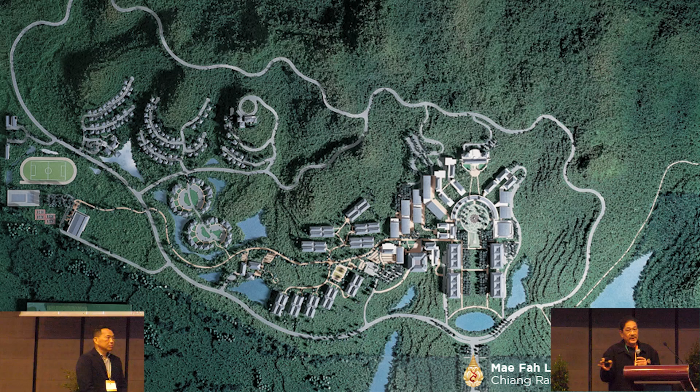But first of all, I'd like to bring you back to the Mae Fah Luang project, which started in 1998, almost 30 years ago, as Professor Wang, who is chairman of the university, mentioned. Can you imagine, back almost 30 years ago, we were with this land with no high-tech instruments at all, no GPS. I'm the project manager of this project.

The land plot is around 2,000 acres altogether, but what we were assigned to develop was just the 500 acres in front of the plot. At that time, with no GPS, I had to use aerial photography and walk, and went with a small truck trying to locate the boundary of the university. It was quite difficult.

In fact, we have two projects, about the same, both academic projects. This one was designed and built 20 years earlier than the second one that Mr. Somkiat will present. The most important thing is that this project belongs to OHEC, the Office of Higher Education Commission.

It was a competition project. The idea, as Professor Dr. Wang said, is that the main concept is to try to minimize cutting down trees, try to minimize changing the topography and everything. So we kept that concept strictly.

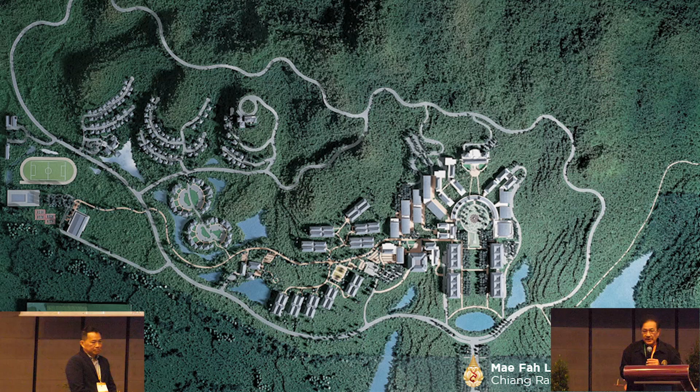Anyway, we finished 82 buildings, and this is a picture, probably not long ago. You'll be able to see the big trees, like Professor Wang said. When I came here, it was a paddy field down at the foot of the mountain - a destroyed land, not many big trees. But once we worked according to the concept design, we created something like this.

Two projects belong to OHEC, and another one is PTT, the Petroleum Authority of Thailand. As an architect, we try to convince the client to do a good master plan, to do good landscape and blend it together with the architecture. Fortunately, both of our clients truly understood the concept of the planning.

Since we are in Chiang Rai, I'll present this project to you a little bit. Like Ajahn said this morning, King Rama IX said to plant the tree in the people's heart first, and they will plant the tree.

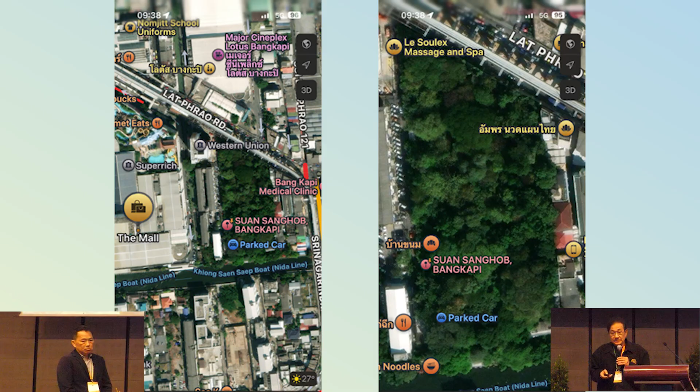This is my house, right in downtown Bangkok. It's 4 acres. Sometimes you can hardly convince your client to plant trees, to do a good landscape, but this is my house - I'm the client, so I can do whatever I like.

And our family, since my father, we started working, planting trees like this. No one can cut the tree. This is the only privately owned place in downtown that we try to maintain - anyone who cuts a tree will be beheaded instead of the tree.

But anyway, just to give you the point, as our Professor Prabhakorn said - this is my house, as you mentioned. So before that, start doing what you can do first, like planting trees everywhere.

Now I will pass to the second part, the main presentation of this topic, to Mr. Somkiat. He's the project manager of the Wangchan project, which belongs to PTT. It's pretty creepy - just kidding.

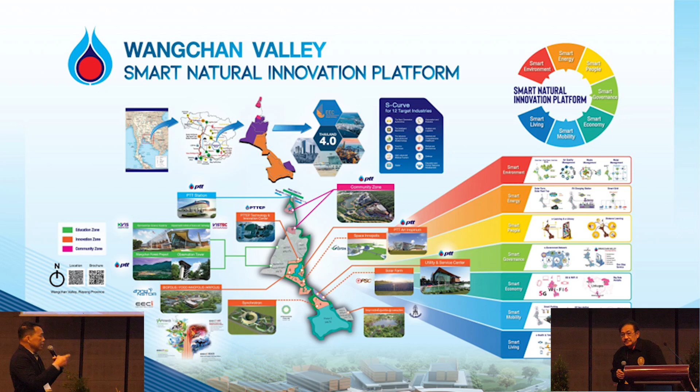Just a bit of background on the Wangchan Valley. Basically, it's really like a science research park, belonging to PTT, similar to Petronas of Malaysia, the Petroleum Authority. It's coming up pretty good, with numbers of institutes or research arms of corporates coming to the place.

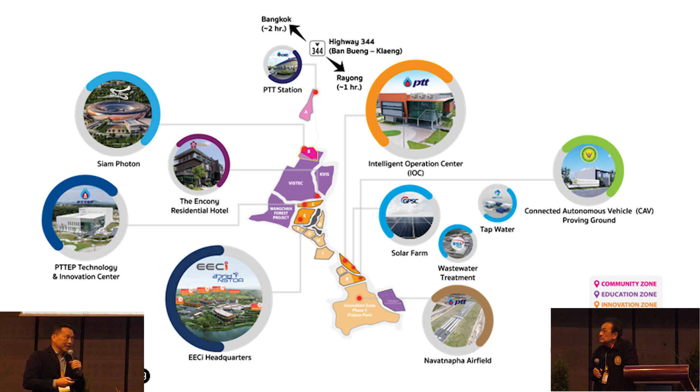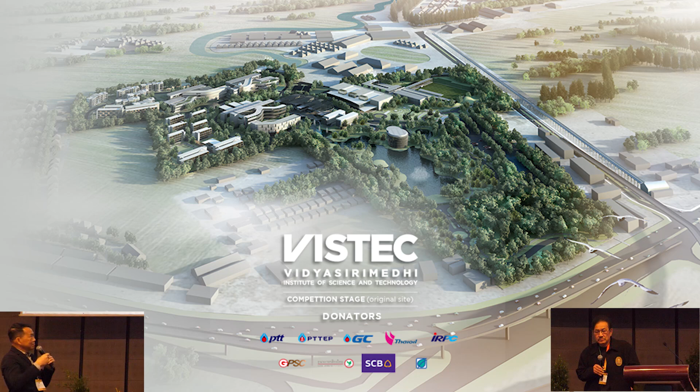They thought perhaps they got a better location, so they moved to this Wangchan site, and we got short of 2,000 acres of land. It's a coincidence - this is the same site area, 2,000 acres, as the Mae Fah Luang project. I believe originally in the 1990s, the land was accumulated for an industrial estate.

We still see banners protesting the industrial estate for this land when we went there. PTT asked us to choose a portion of land to build a university, a future university, and this is what happened and what we did.

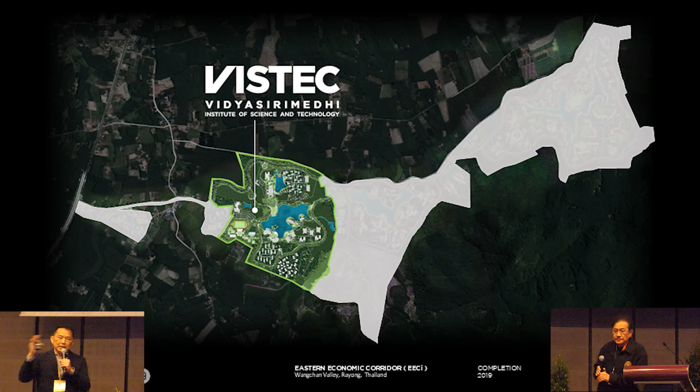But we proposed at that time, what about the rest of the land? Are you going to just leave it empty? Should we do something like an estate, some infrastructure so that institutions or research companies can come in? They actually agreed to do that, and this is just a study master plan.

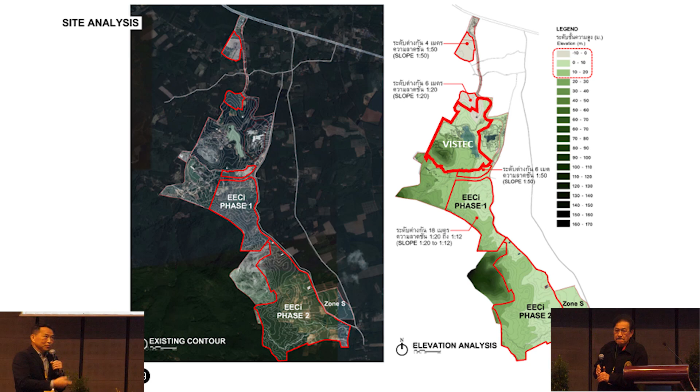Of course it will be phased, and then it became part of the EECI, the Eastern Economic Corridor, initiated by the government, and we are quite honored to be part of that future project. It will be subdivided into smaller pieces of land, and you can see it's coming up.

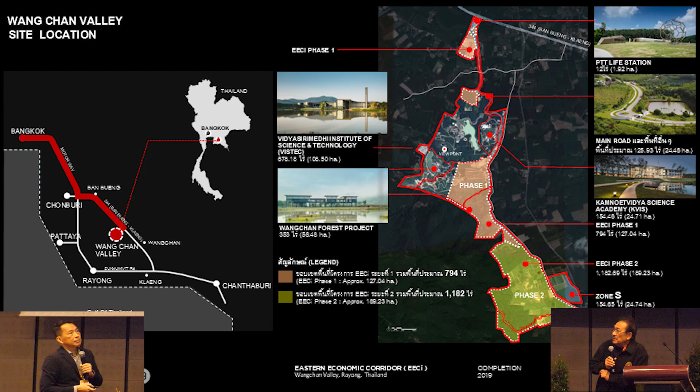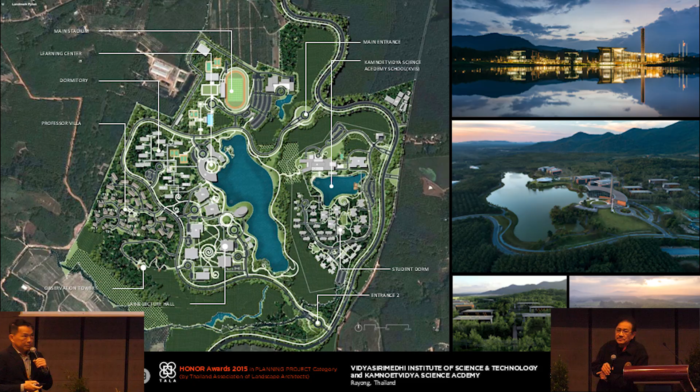Now I'd like to bring attention to the university part. Actually it's not yet a university, but it's basically a science institution that provides only postgraduate education. I think it comes from the belief of PTT that science will lead the country, to have a science education.

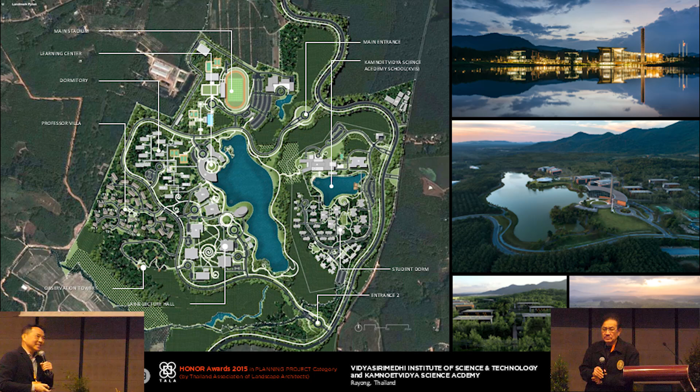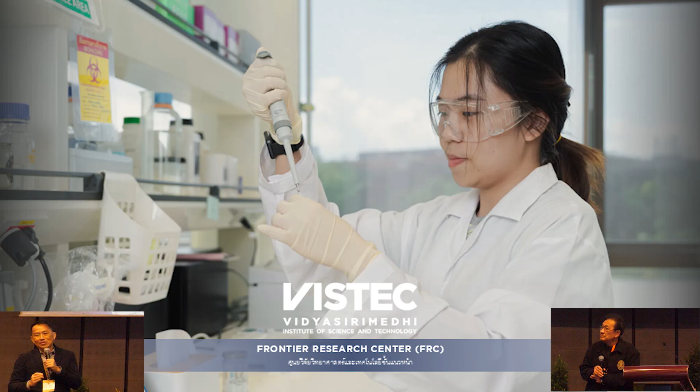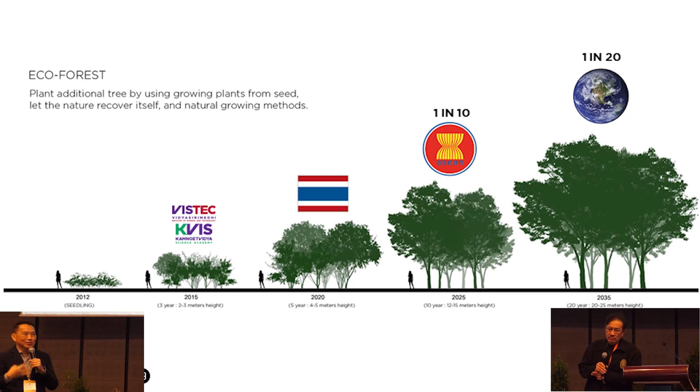You can see that big lake that Prabhakorn just mentioned. Just a bit on this VISTEC - it's still called VISTEC, and they provide only frontier research, with the ambition to go global. This was from the competition page. We also proposed to plant some trees that could grow along with the ambition.

And those are some pages from their website. They are actually doing pretty good at the moment.

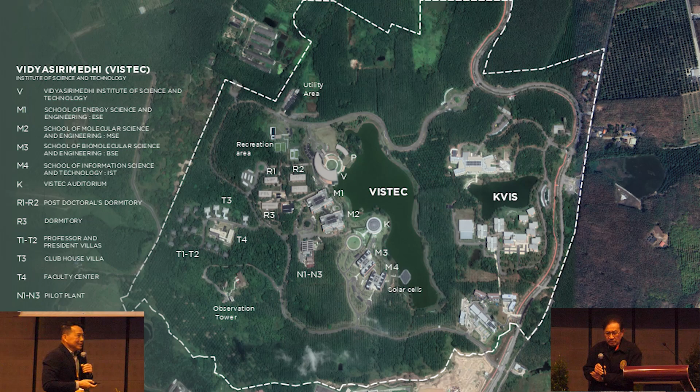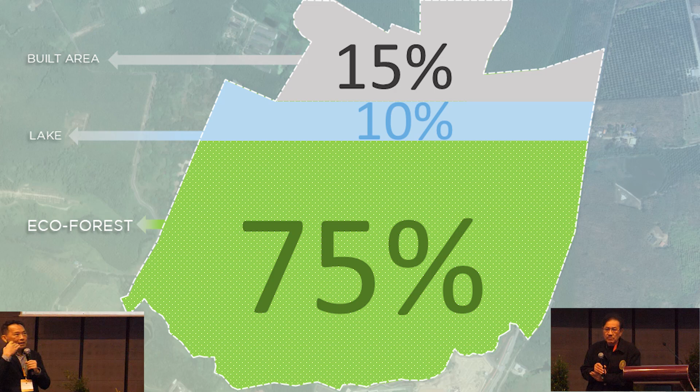Now back to the lake you mentioned. We had this idea of having an eco-forest, lake, and minimal built area. We also learned at that point that the lower part of the site is actually about 73 meters above sea level, and there's some low-lying area that gets flooded every year.

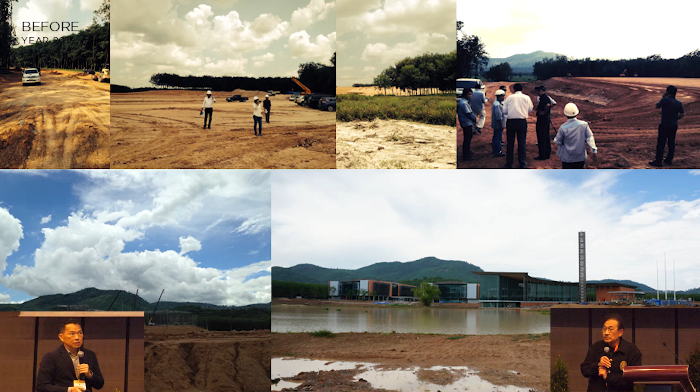Even though they are on private property, that's the construction image during the construction, built with a lake in the mountain. People always complain about why we do the lake on the hill, since it's quite difficult to contain water, but in fact that's problem solving - we try to manage the water drainage in order to protect the community from flooding. That's the answer we give to the public.

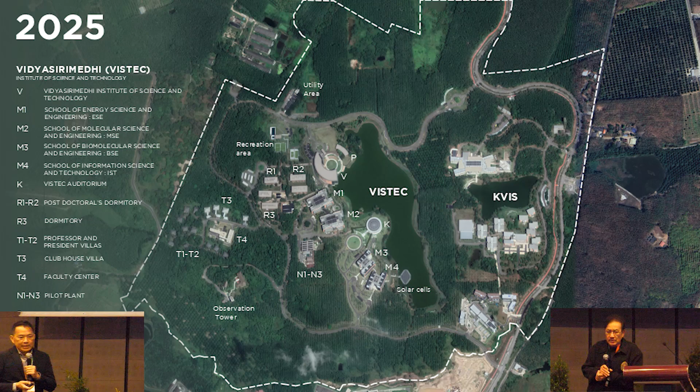The mountain behind the campus is similar to Mae Fah Luang. The problem with Thailand is that we got rid of the forest and made it into agricultural land - that's what happened, and now we have to return it back. They did all kinds of agriculture, like cassava, pineapple, rubber. At some point, just right before the construction - that's the construction of the project - and nowadays it's turned into, yes, it looks pretty good.

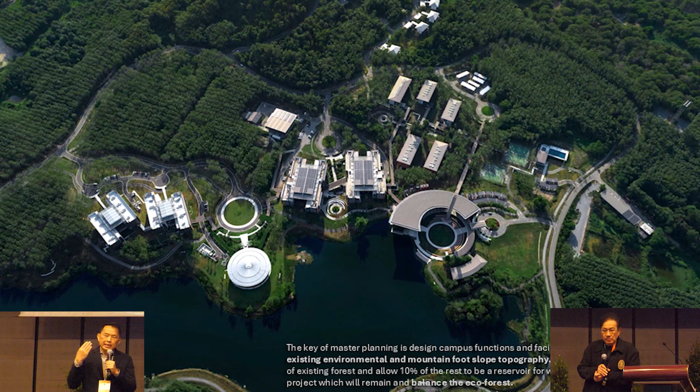And that's the photo, just a bit on the rubber plantation. When we work on the project, there's also a voice saying the rubber tree has no value and will die in some years. But in reality, when I did some reading, they can last 40 to 50 years, and in some cases almost 100 years. So all plants are creatures.

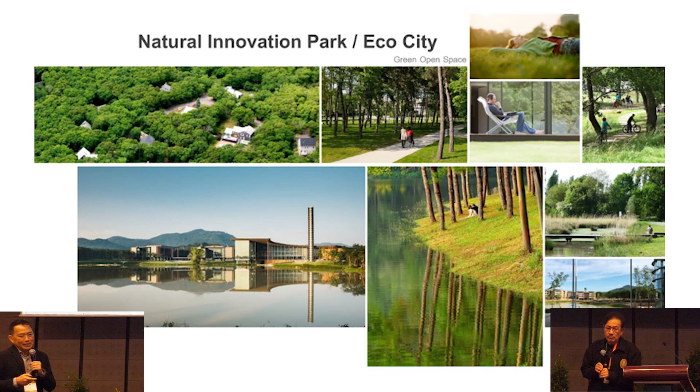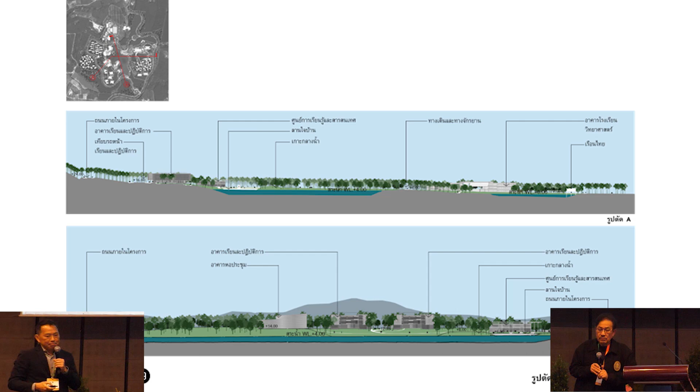That's from some presentation page, but basically to have a campus that goes along well with that, this section shows the man-made lake, and actually there's a smaller lake as well.

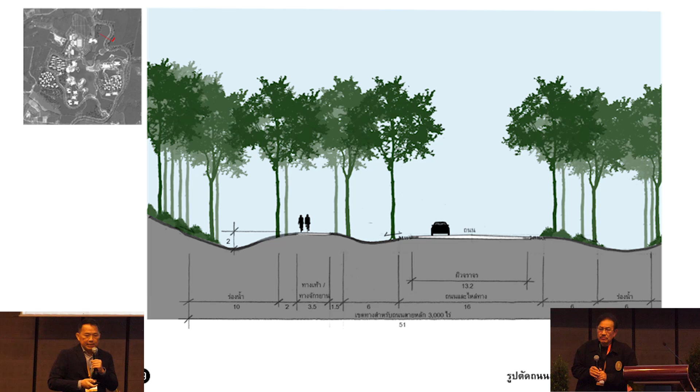Another point I'd like to emphasize is living with nature, with whatever we have. For example, when we do road work or a bicycle lane, we look at maybe 10 feet from the bike lane and leave it to nature, like a forest, so we only have to take care of a minimal area.

I'll just run you through some current slides. If you go back to the master plan, it's a boarding school, which means you have to design to combine everything within walking distance, not just because of the dormitory. The student should be able to walk from the house or dorm to the library, because normally the library is open 24 hours for this kind of university, so it has to be quite convenient for the student.

And in fact, it is a forest. It used to be a big forest, and it's still a forest. We have to work with whatever is there.

It's also good, for example, if you want to keep the rubber trees, you can't do land excavation or landfill. The most common question is, if you have a big forest like this, what about the animals, the poisonous animals, like snakes, everything? We live with them. Frankly speaking, we can live together.

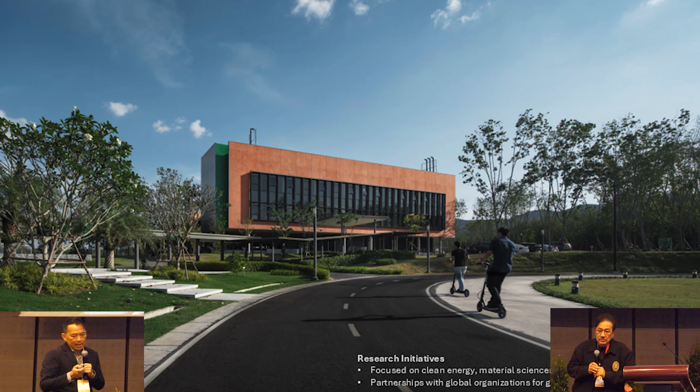This is quite latest, but you can see how the rubber trees go along pretty well with the building. This is our lab building. Even with the rubber plantation and palm oil and so on, it still looks good.

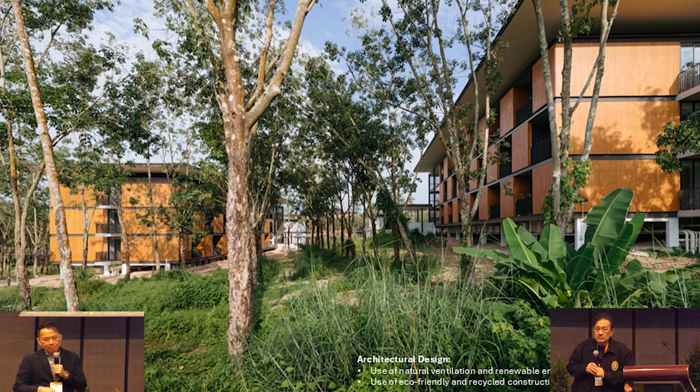You can see that it's raised up, and that's the walkway, designed by Prabhakorn. The instructor's residence, the house, also rests on columns.

We try not to destroy the topography. We try to maintain it as it is, and then eventually the plants will grow and complete it. Fortunately, we have two projects that share the same concept, so we can implement what we presented to them.

It's strange because this is an academy, also a campus, same scale of property, same idea, mountain background, and the same concept. The client believes in working with green architecture and blending with good landscape.

I can tell you there is really minimal excavation and landfill for the project, very minimal.

I give lectures at many universities, and I always teach them that nature is quite important. In one field we call it biomimicry, meaning architecture designed from nature. My professor, when I was in the States, taught me about that. This is a magic word. I always tell students that in nature, everything that survives is designed right and is right.